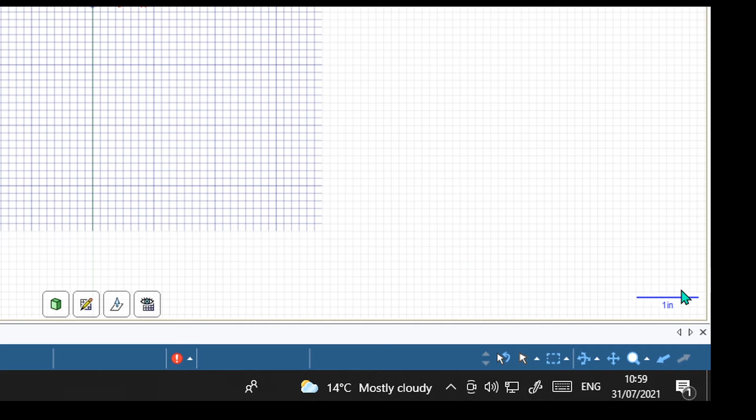Now please note, in this project we're going to be working in inches. See down here in the bottom right hand corner, we'll zoom in on that. That line represents, in this case, 0.6 of an inch. If we zoom out or in, we can change that. Now the line is representing 1 inch on the screen.

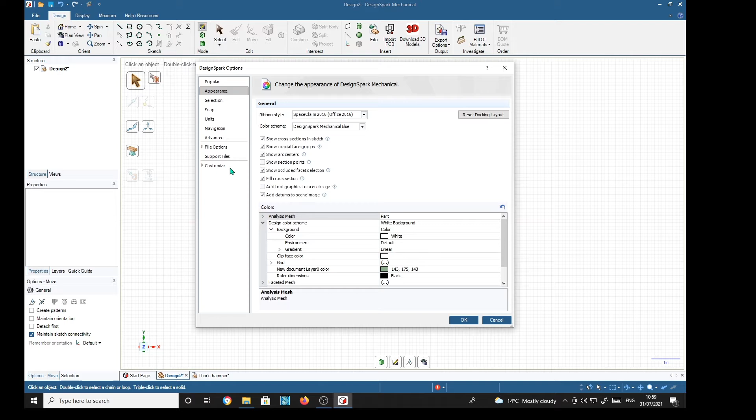So if you're working in something else, you'll have to adjust your dimensions or change the units you're using. You do this by going up to File, in the top left hand corner, select DesignSpark Options, then Units, and change to whatever you're working in - imperial in this case, inches, decimal, degrees, etc.

So now that we know we're in inches, I'm going to put several shapes on the screen that we're going to use to make the parts for our Thor's hammer. Let's go for the hammer head first - a rectangle, 2 inches, 2, tab, 4, return.

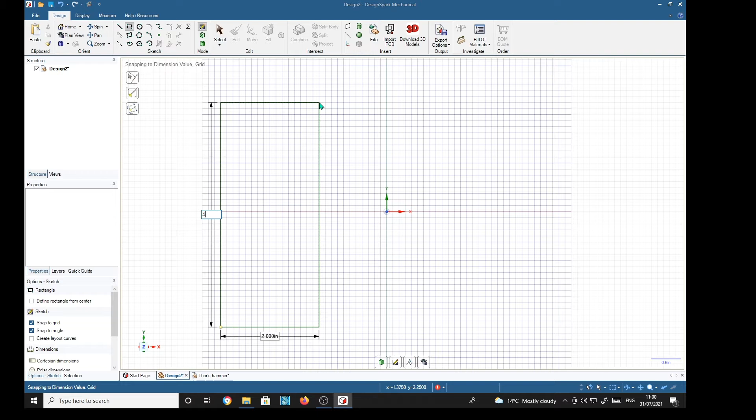Then for the shaft or handle, I'm going to have a circle, 0.56 of an inch. Then for the little ridge grips to fit on the handle, we're going to have an annulus, 0.56, and then another radius of, would you believe, 0.65.

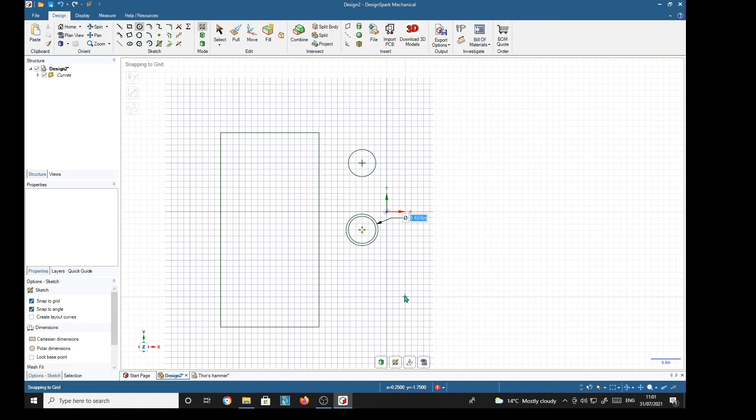Now the pommel we'll make out of another circle, starting with a radius of 0.65 - a diameter of 0.65 rather. And there are all the shapes we need to make the body of Thor's hammer.

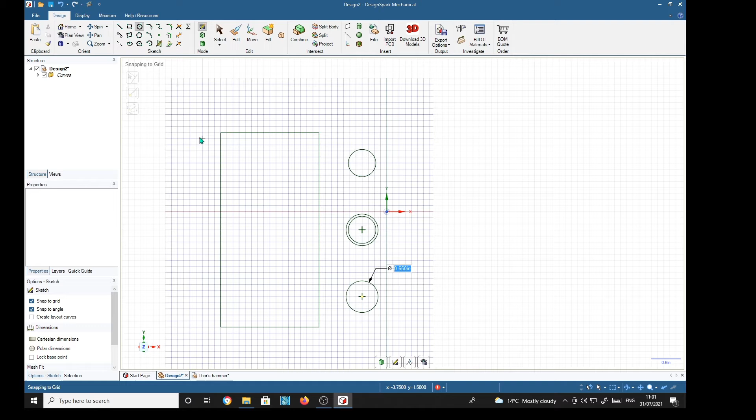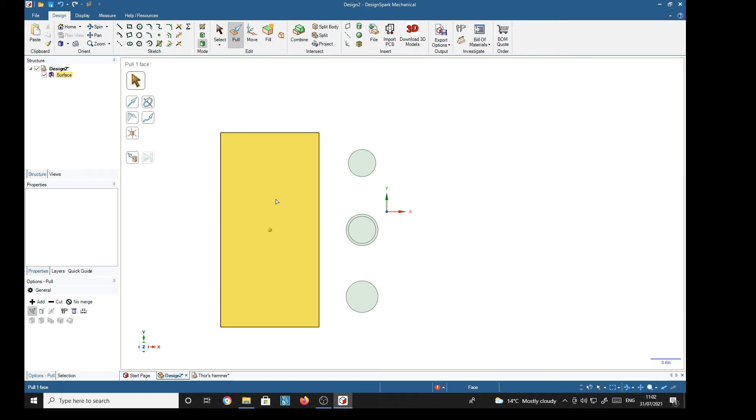The next job is to pull these into 3D volumes. So we go to the pull tool, type P on the keyboard, and we are now presented with several surfaces. This one has got a surface in the middle of it, so we'll be dispensing with that later. We select that surface of the hammer, and we'll make this hammer head first.

Now we need to pull that into a thickness of 2 inches. So now we've got that.

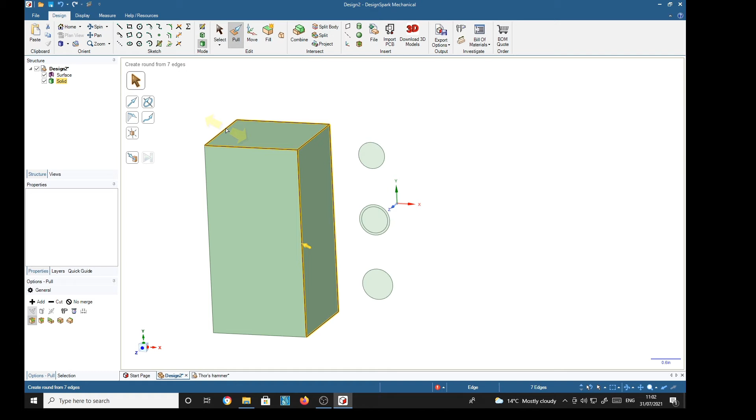Now we select all the edges, double click, and that's selected that edge there. Hold the Control key, double click, and we've selected the top edges. Double click. Now we've got practically every edge, but these two on the bottom. So separately with Control key pressed, click 1 and 2. Now there we should have all the edges selected.

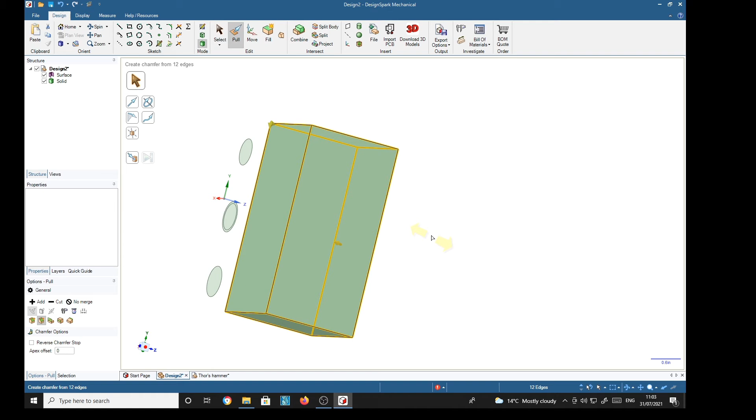Now make sure that you've got the chamfer, rather than the round, selected across here. Select the chamfer options. With all those edges selected, type 0.3, return. There's the general shape of the hammer head.

Now that we've got that, I'm going to rename it. Rename, HEAD, head. Return.

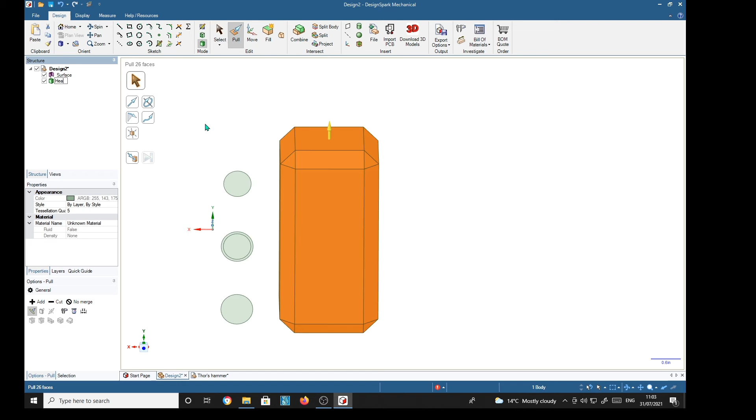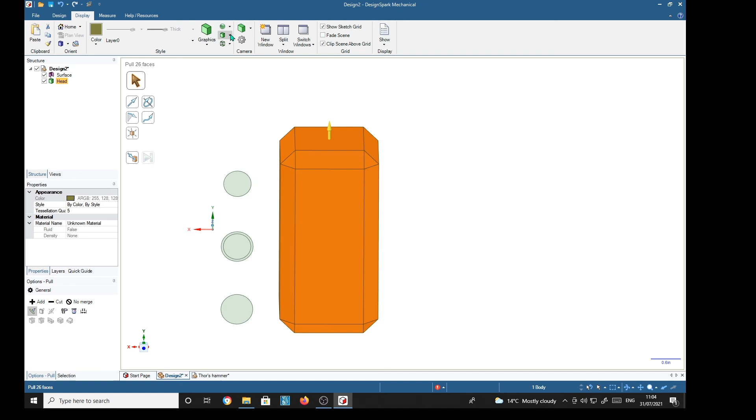Now let's make it the right colour. Select head, move to display tab, select colour, and I thought a nice colour is a dullish grey. We'll give it a surface finish - up here, this rendering style, metallic. Click it again and the finish will leave at medium gloss.

Now something has certainly gone wrong here - chosen the wrong one. That's the one. There we are. Now that's the general shape and colour of the hammerhead.

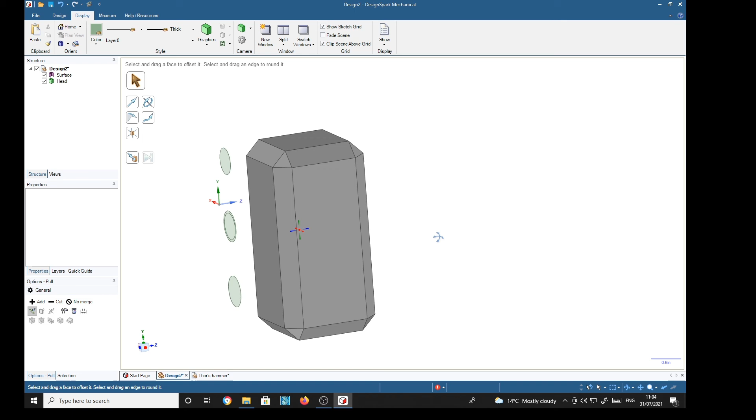But let's do something quite neat. We're going to go to the file in the insert panel, select file. Now I've searched around the web and found this little image which I've put into a folder here - My images, Thor's hammer images.

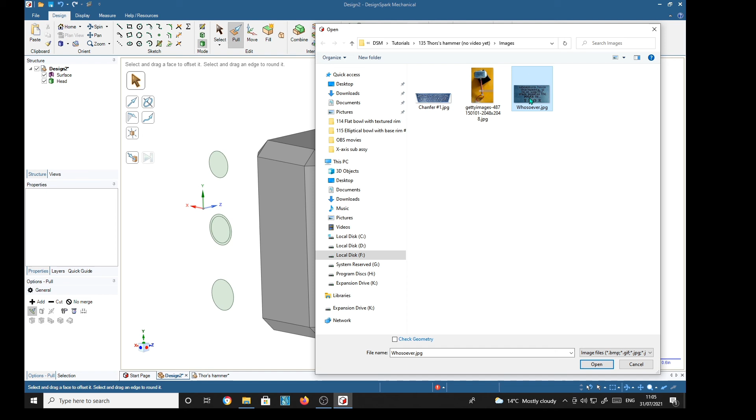I'm going to select whosoever. Open it, and we've got this: whosoever holds this hammer, if he be worthy, shall possess the power of Thor. Okay.

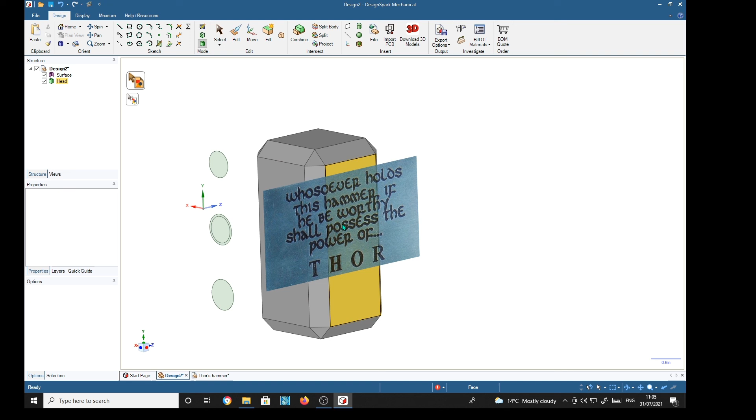So we'll find one of these surfaces. Any one will do. Click, and there it's on that surface.

Now it's the wrong way around. So how do we move it? Well, we select it, move tool, and turn it around 90 degrees. 90, there we are, 90.

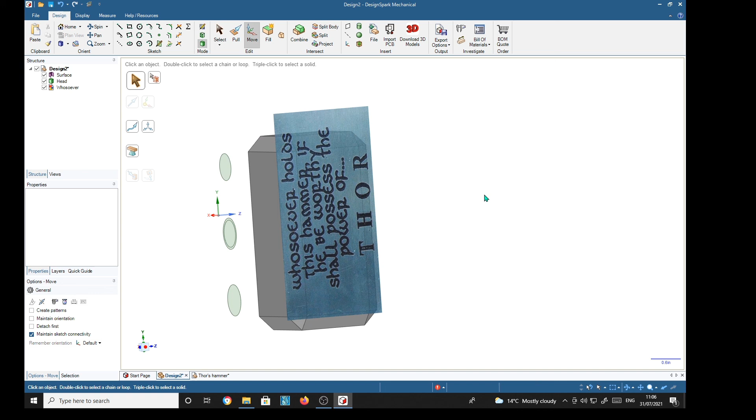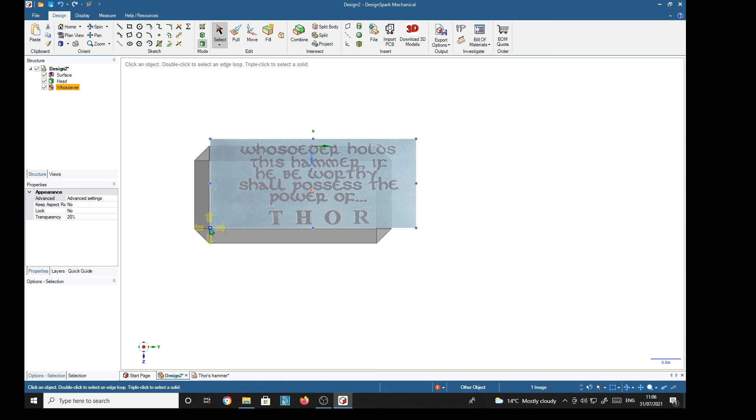Oh dear, we think it's not fitting. Well, to make it fit, select it and select the select tool. Now you will see little dots on the corners and sides. We can use these. We'll turn it so we can see it nicely. There, and there we go. So we can move these little corner points to make it fit there. And there's our hammerhead.